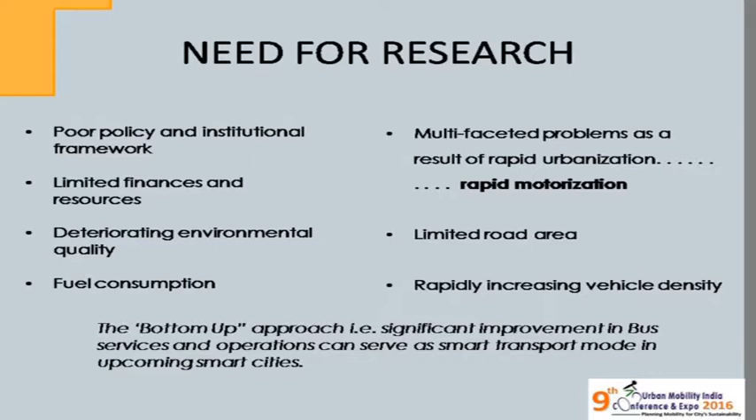So the study aims at the assessment of the effectiveness of the queue jumper lane and signal priority on the bus performance. Research objectives are, first, assessment of the queue jumper and TSP, and second, using micro simulation model tool for bus performance improvement. So research approach is as follows: the review of literature and regulatory design, followed by primary and secondary data collection for model development, then scenarios generation and evaluation, followed by the calibration and validation of the model, then conclusions.

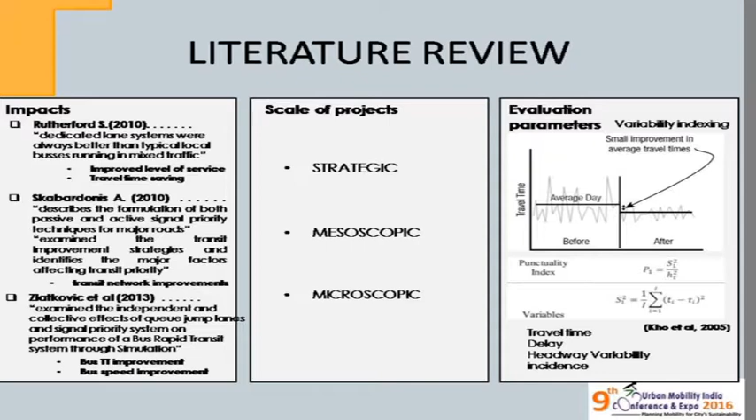So literature review, for various bus priority systems we can observe, like for dedicated lane based system, improved level of service, travel time saving. So this queue jumper is also a kind of dedicated lane based system at a junction only, if we are having space constraints. Then the scale of projects can be strategic at a city-wide level, then mesoscopic, that can be a grid of streets, and microscopic, that can be few junctions. I have taken various evaluation parameters like travel time variability, delay, headway variability, and incidence of the variability.

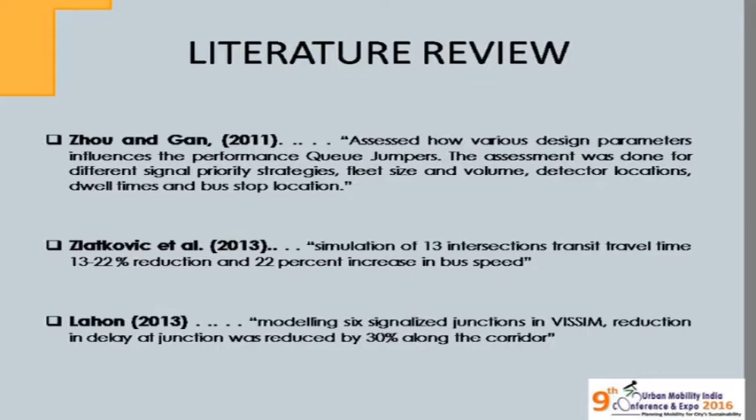Various authors have done assessment of the queue jumpers. The first one, they have assessed different signal priority strategies, fleet size, volume, detector locations just before the junctions, then dwell times and bus stop locations. Then the second one, they have simulated the 13 intersections and transit travel time. They have observed a reduction of 13 to 22%. Then Lahon 2013, they have modeled 6 signalized junctions and a reduction in delay of 30% was observed along the corridor.

So next is the model development. The first one is the test corridor, which is from the Shivranjini split flyover to the APMC road junction in Ahmedabad. That is a part of the 132 feet ring road. Number of lanes are 4 on each side. Currently no segregated bus lane is provided.

The land use is predominantly mixed use, and there is a proposed prioritized bus plan that can be a BRTS or BRTS augmented with signal priority, and this will serve as a feeder to the proposed metro that is coming over here from APMC road junction to the Jivraj Park, then the metro goes over there. So total junctions are 8 and signalized ones are 4. The first one is Premji Nanji Crossroads, then we have Shyamal, Jivraj Park and APMC road junction.

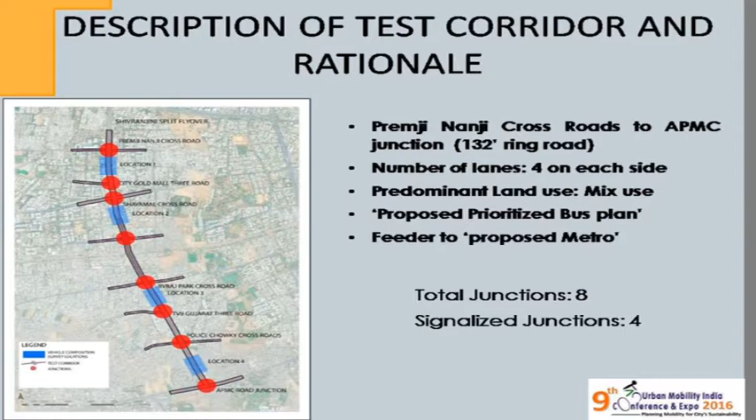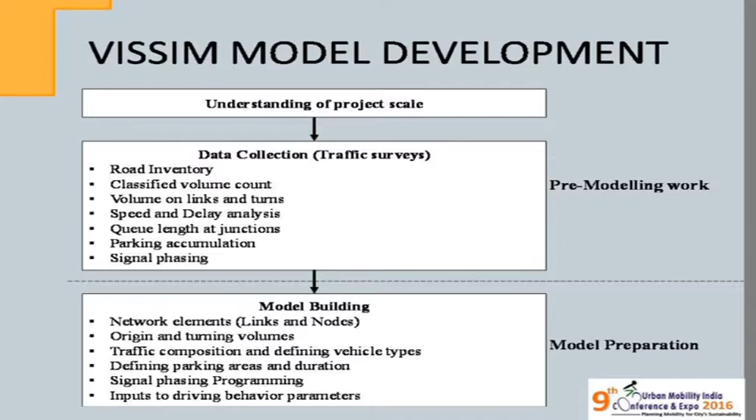So the VISSIM model development involved pre-modeling work that included data collection, followed by model preparation that included network creation of network elements, origin and turning volumes at the mid blocks and junctions, then traffic composition and defining the vehicle types, defining parking areas and duration, signal phasing programming, and inputs to the driving behavior that are Indian.

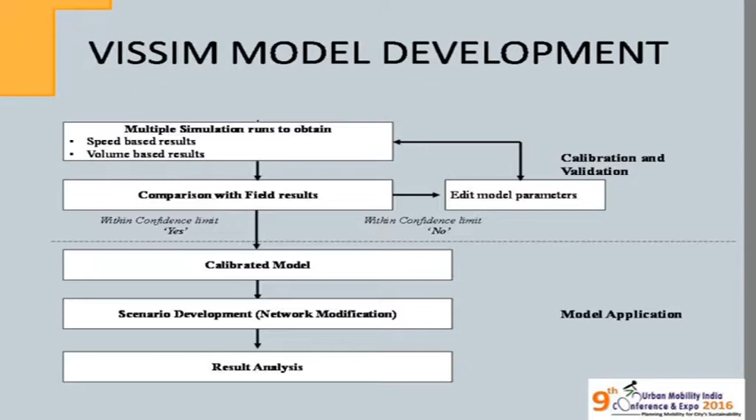Followed by the basic model development, we have multiple simulation runs to obtain speed-based results and volume-based results. So we have a multi-criterion approach for the calibration, and if you compare that with the field results, that is within the confidence limit of more than 95%. Then we have a calibrated model and we can generate the scenarios, and this model can be used for various applications. So the calibration process involved various trials with the Wiedemann 99 parameters.

First we have taken the default parameters, all those default values for the standstill distance, headway time, follow variation of the vehicles, general behavior that slow lane rule, desired position at the middle of the lane, and then lateral distances that is unticked, and for various desired speed distributions default values were taken. But the results we can observe in the validation process.

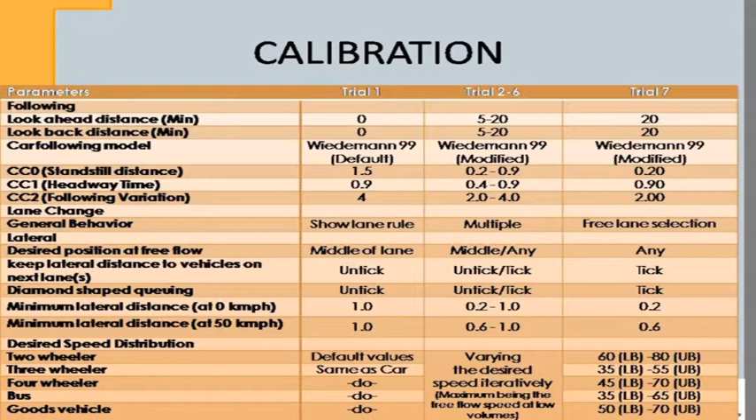Trial two onwards included the modification of look ahead distance and look back distance, and the standstill distance was reduced to 0.2 to 0.9. The values were varying, various iterations having different values. Then the headway time was varied, follow variation was varied. The general behavior was not simply the slow lane rule, it included slow lane rule or simply free lane selection, and desired position as observed in Indian conditions would be middle or any. Then desired speed distribution varied iteratively, maximum being the free flow speed at low volumes.

Then trial 7, for this we found the calibrated, validated model having a confidence limit of 95% or more. The value for look ahead distance and look back distance was 20. The standstill distance was 0.2, headway time 0.9, follow variation 2. General behavior was free lane selection, and desired position at free flow was any position in the lanes. The desired speed distribution lower bound and upper bound values were as follows.

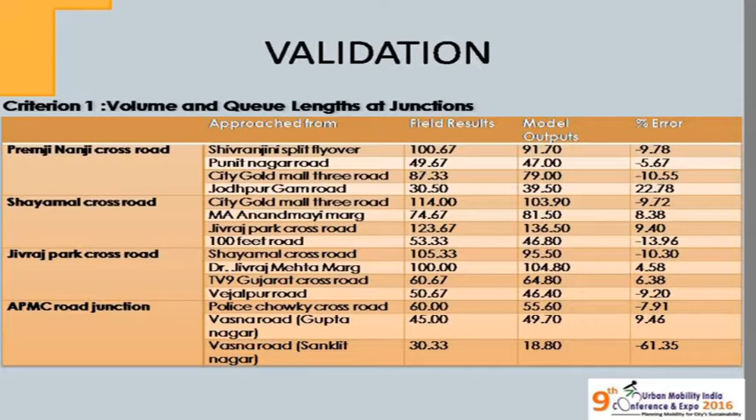So the first criterion was the volume and queue lengths at the junctions. We have the field results and the model outputs, and we observed the percentage error. So these are the queue lengths we have calculated out of the model, and these are the field results, and the percentage error can be seen. The roads or the links along the corridor were having values less than 10. The second criterion was the travel time and delay.

That was link wise, because this corridor has a comprehensive kind of structure, like a free flowing speed from the highway till the Jivraj Park crossroads. Then we have an elevated section also. Then we have a wide section from Jivraj cross junction to the APMC. So we have to validate the results of travel time and delay link wise. So we have the field results of the travel time and model. The maximum residual error can be seen as -11, so that was within the confidence limit. So based on that, we have a calibrated and validated model.

We developed the scenarios. We have a base scenario which represents the base network, curbside bus stations, and no signal priority is given currently. Then we have a queue jumper, and a queue jumper will only be effective if we have active signal priority. Otherwise, if the bus can't maneuver through the traffic, it can't get signal priority, and this queue jumper won't be effective. So in this case, we have a queue jumper at the junctions and curbside bus stations.

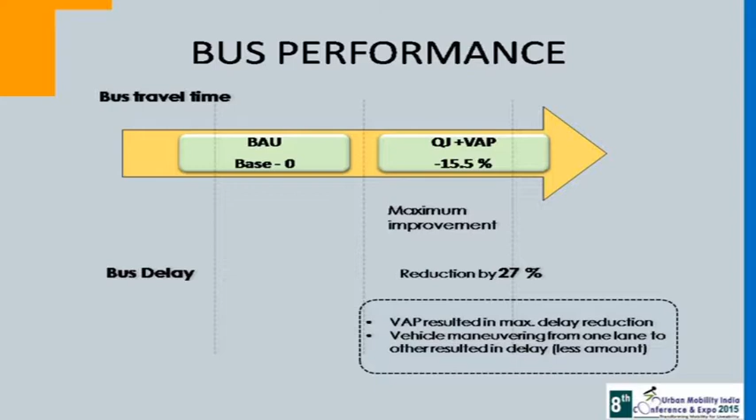Then we have the travel time variability of the various vehicles for the time we have run the simulation. We can see the variation of minus 88 seconds to 158 seconds. That is huge. That is plus minus 30% of the variation from the scheduled timing. Whereas in case of queue jumper and vehicle actuated priority, the variation is quite less, 0.5 to plus 10 variation. That is just 19 to 28 seconds.

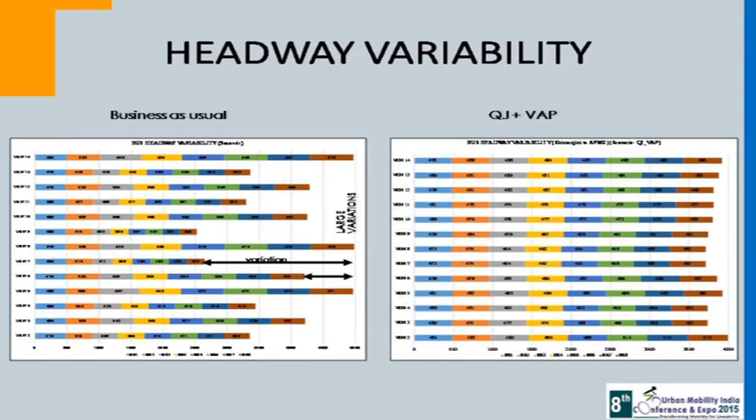So at the end, we can see there is large variability in case of business as usual, and there is maintained headway in case of queue jumper and signal priority. The headway variability across various stations can be observed. These are various bus stations. There is large variation, and the vehicles are actually following, and at the junctions bus bunching would be happening, whereas in this case there is uniformity, and there is hardly any variation, plus minus 2 seconds. So headway variability is greatly reduced.

Then we assess the impact of increase in traffic, whether the queue jumper is effective in case of increasing the traffic for V/C more than 1. So for increase of 5%, 10, 15 up to 50, we have observed there is an exponential increase in the queue length. Because every time the bus is getting green, if we are increasing the bus frequency also, we are getting huge queue lengths of the private vehicles, and it surpasses the queue jumper lane's length. So the bus can't even get into that queue jumper lane.

So this solution can be a short-term solution or can be a solution for the feeder system that is running at the periphery, or some kind of feeder to the mass transit system. So the queue length extends over the previous junction also, like in this case we can see. So the bus cannot cross this junction and this one, so the delay for the bus also increases exponentially.

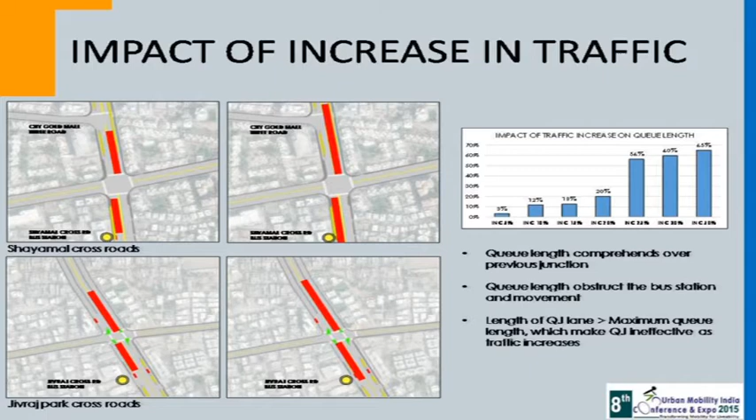So we can conclude queue jumper lanes have to be provided with active signal priority, and in the short term the results are comparable to buses running in the segregated lane, that is BRT, provided without any kind of signal priority. In the long term, the delay and travel time increase exponentially, both for bus as well as private vehicles. There are worse impacts on the private vehicles, and overall there is poor network performance.